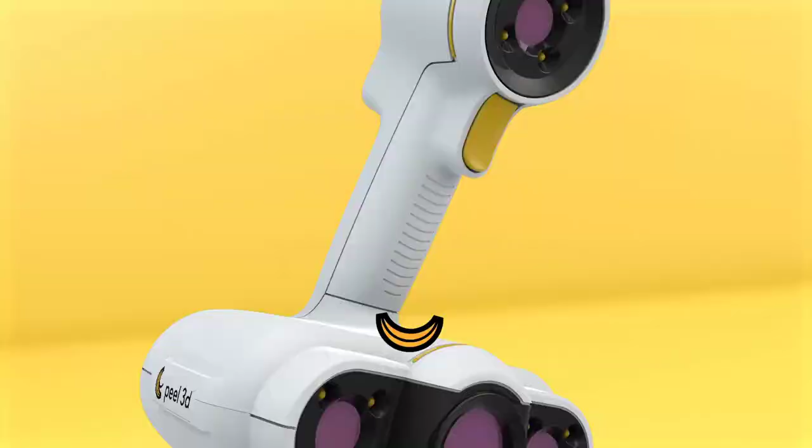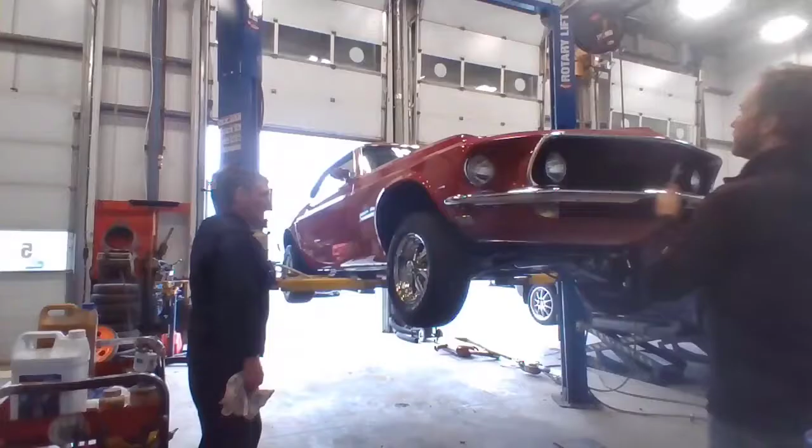So, step 1, we're going to scan the exhaust on this Mustang 69 with the Peel 2 scanner, and then we'll go back to the office for the post-treatment in our bridge software, Peel 2 CAD. I came prepared. I came with Louis Etienne, who's been doing this for more than 10 years now, so it's not his first scan and he's going to give us a few tips along the way.

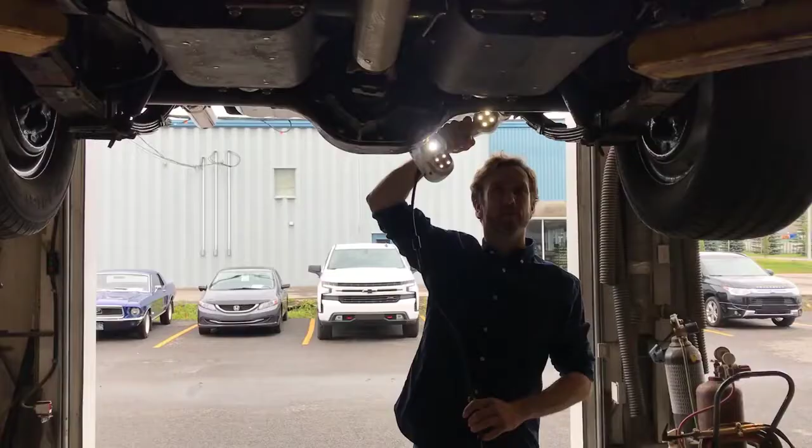The scanner creates a live mesh for us, and now we're going to save it as is as an STL file. First post-treatment step, clean the mesh and keep only what we need. Now it's time to use Peel 2 CAD toolbox to extract all the important geometrical entities we'll be needing.

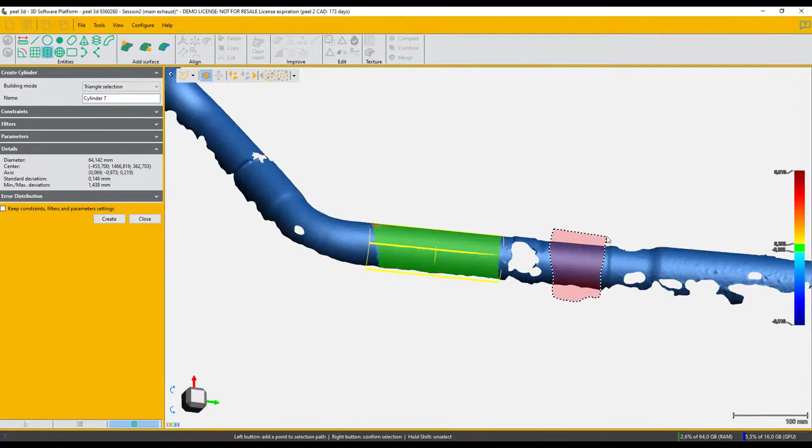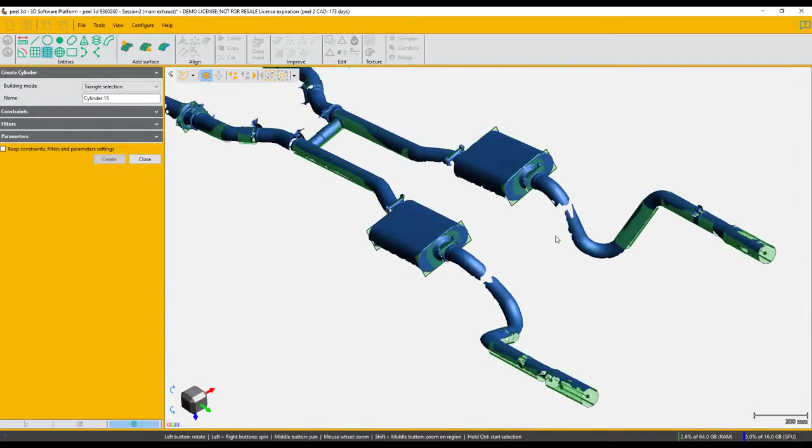The mesh itself can be useful as sort of a reference in a CAD, but it's a dead entity, a bit like an empty piñata, so depending on which CAD you're using, chances are you'll be needing at least a few planes and entities here and there to work your way through a design. So in this case, mostly cylinders to build the pipes and a few planes to locate the brackets and mufflers.

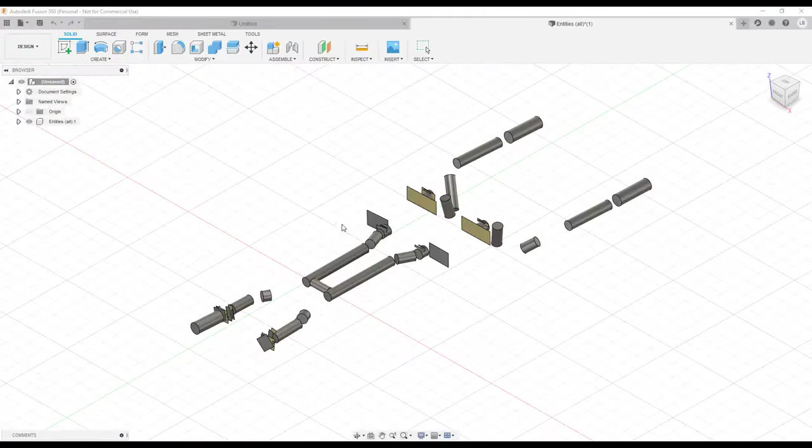Now that we've created all the entities we need, we export them together as STEP files and we also save the mesh. Now time to open Fusion 360. This specific CAD software has a tool which allows us to create sketches from mesh cross-sections. To create these cross-sections, you see here we're using the plane we saved earlier in Peel 2 CAD.

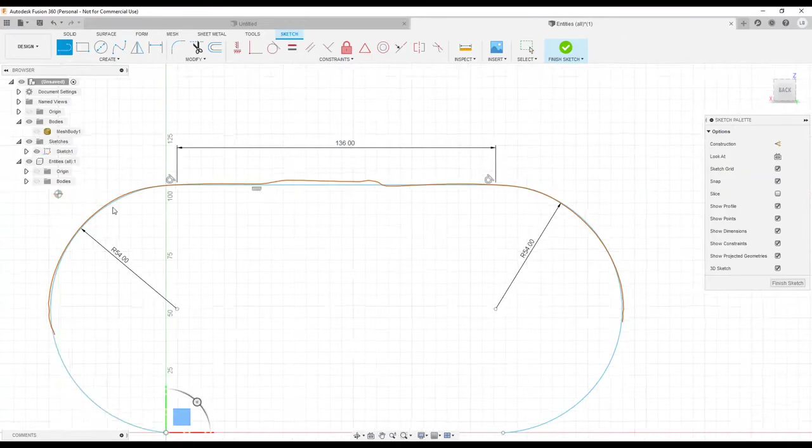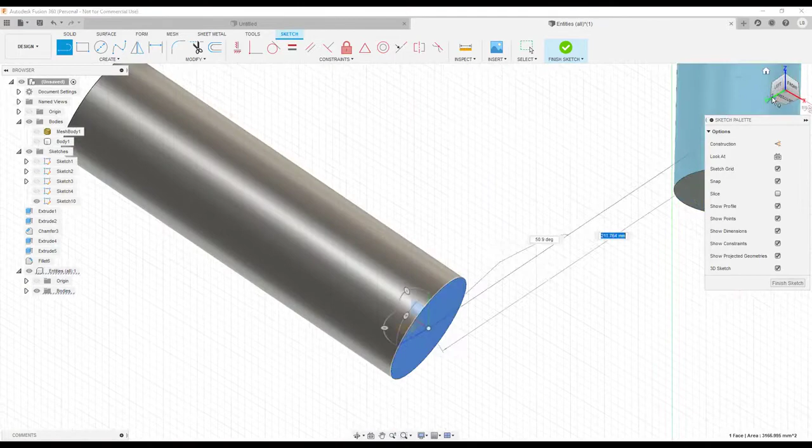So here you can see how the mesh can still be useful as a reference to sort of design around. Now that we're done with the muffler, we start drawing the pipes. The way we're doing it is we create straight lines using the axis of the cylinders we've created in Peel 2 CAD. Then we create a few polylines and we make sure that they are aligned with the axis. We check on the diameters and we have our pipes.